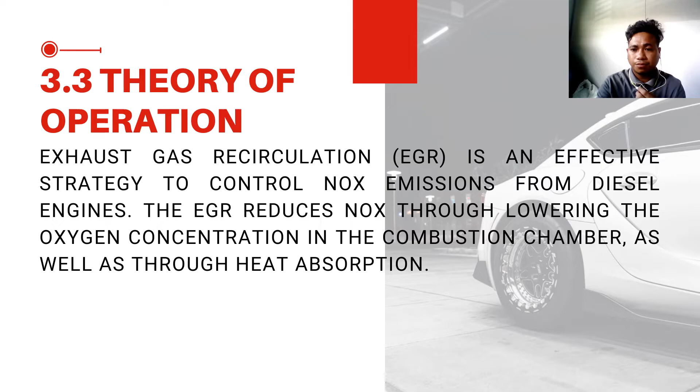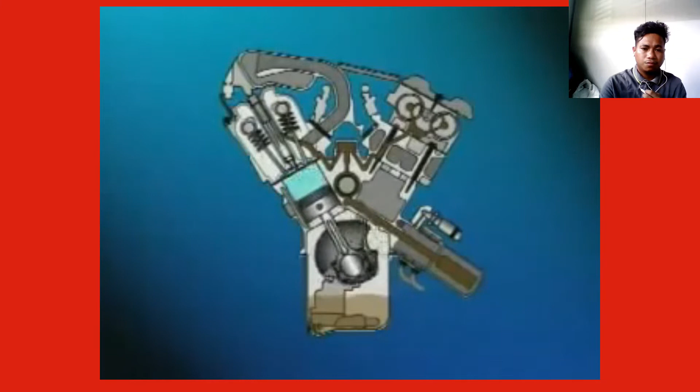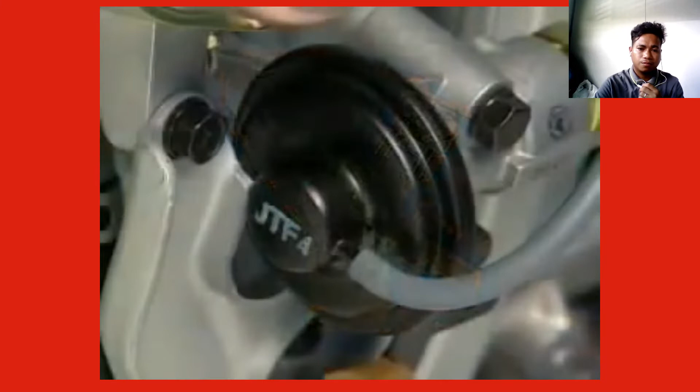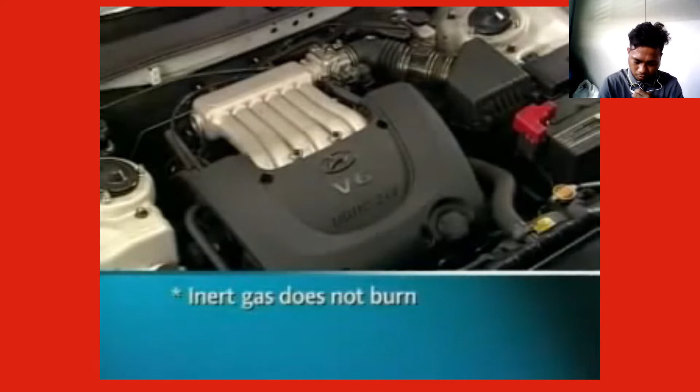The principal function of the exhaust gas recirculation, or EGR system, is to reduce the amount of oxides of nitrogen, or NOx, that is produced during the combustion process. NOx is created by the high combustion temperatures that allow the nitrogen and oxygen in the air-fuel mixture to combine and form oxides of nitrogen. A combustion temperature of at least 2,500 degrees Fahrenheit is required for the oxygen and nitrogen to combine and form NOx. The EGR valve is used to lower combustion temperatures by allowing a metered amount of spent exhaust gas into the intake manifold. This inert gas takes up some of the volume in the combustion chamber that would normally be filled with the air-fuel mixture. The exhaust gas that is recirculated into the intake manifold is called an inert gas because it does not burn. As the exhaust gas does not contain the fuel necessary for combustion, the air-fuel mixture is diluted as it enters the combustion chamber. Replacing a part of the volume in the combustion chamber with the inert exhaust gas reduces the peak combustion temperatures below 2,500 degrees, the level necessary to produce NOx.

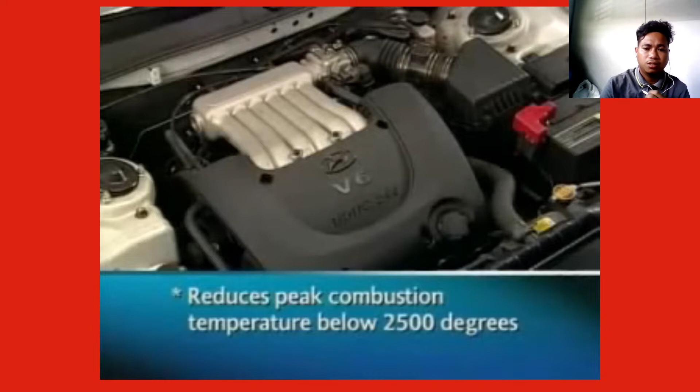Proceed po tayo sa isang topic.

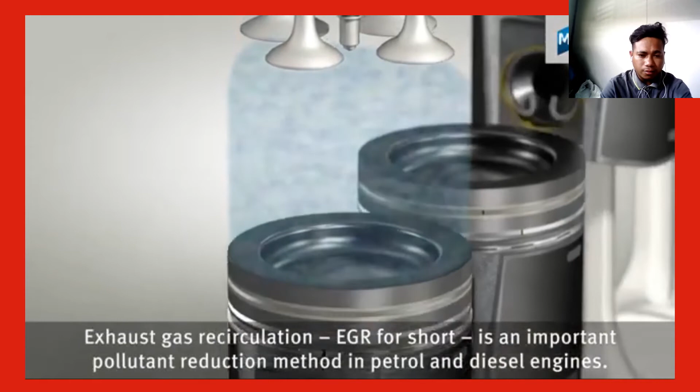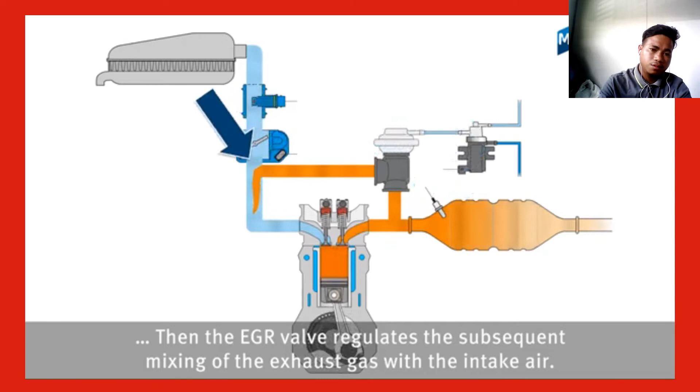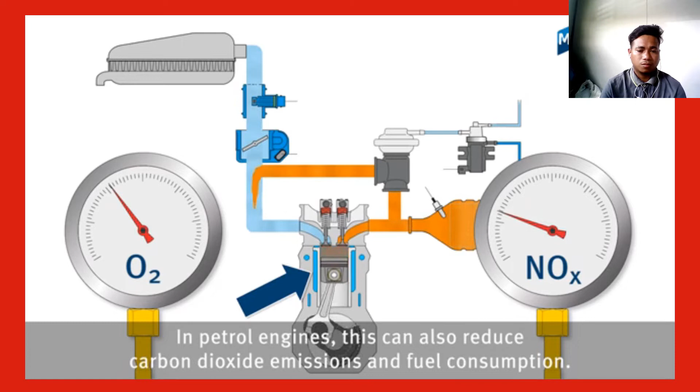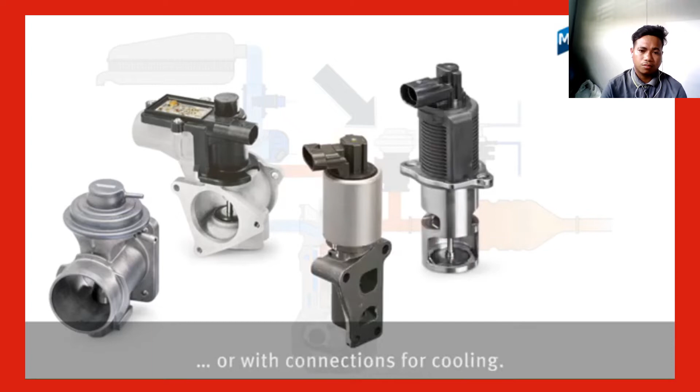Exhaust gas recirculation, EGR for short, is an important pollutant reduction method in petrol and diesel engines. Here we can see its basic structure. Exhaust gas is taken directly after the cylinders. Then the EGR valve regulates the subsequent mixing of the exhaust gas with the intake air. This means that less oxygen reaches the cylinder. Less oxygen means a lower combustion temperature. This way, nitrogen oxide quantities can be reduced by up to 70%, as the higher the temperature, the more harmful nitrogen oxides are produced. In petrol engines, this can also reduce carbon dioxide emissions and fuel consumption. A key component of exhaust gas recirculation is the EGR valve. It meters the quantity of exhaust gas that is returned. EGR valves come in various designs and models, pneumatic or electrical, for petrol or diesel applications, or with connections for cooling.

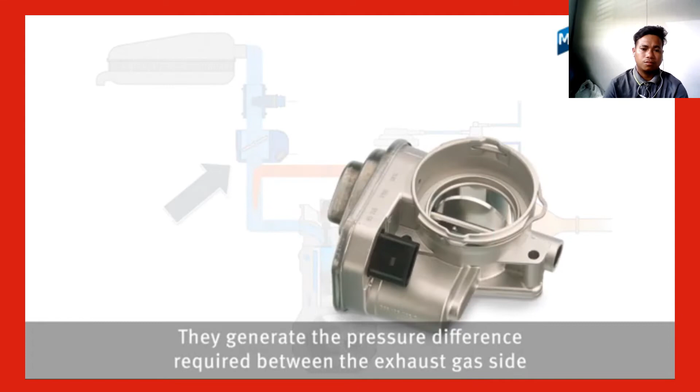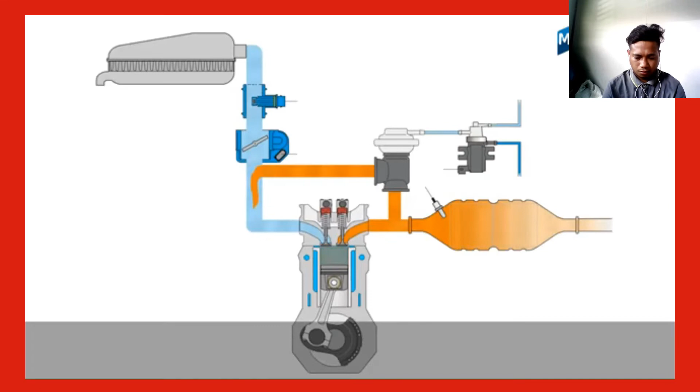Regulating throttles are used in the intake air system in diesel vehicles. They generate the pressure difference required between the exhaust gas side and intake side to achieve the necessary high exhaust gas recirculation rates. Air mass sensors are required in diesel engines to regulate the exhaust gas recirculation, for example.

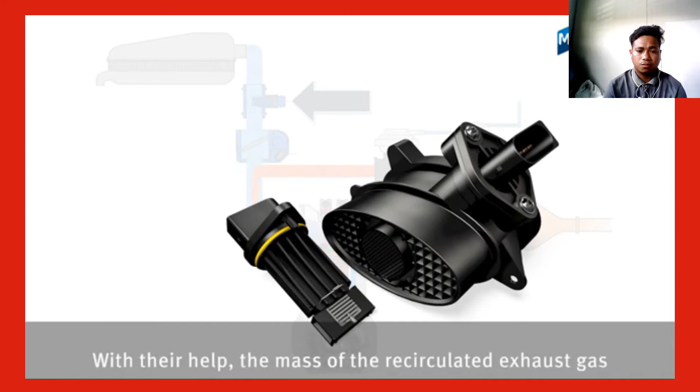With their help, the mass of the recirculated exhaust gas is calculated indirectly using the reduction of intake air.

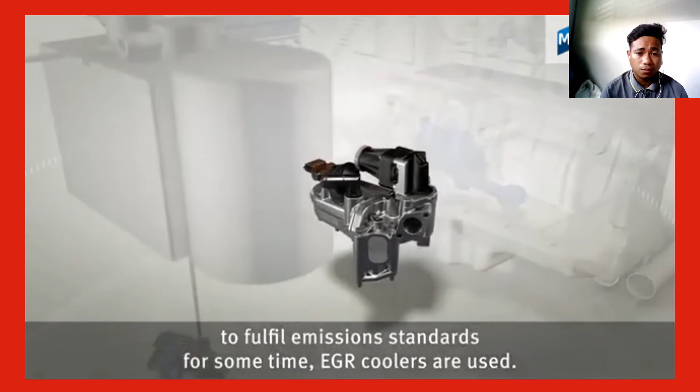Since simple exhaust gas recirculation has no longer been sufficient to fulfill emission standards for some time, EGR coolers are used. Cooled exhaust gas reduces the peak combustion temperature even further. This again significantly reduces the amount of nitrogen oxides.

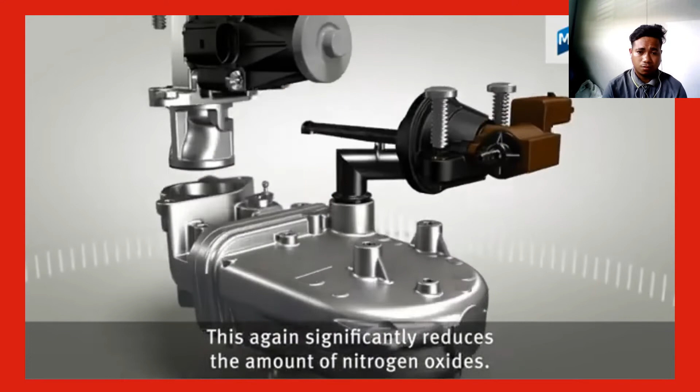Just like all components in the EGR system, EGR coolers are exposed to the extreme conditions of the aggressive exhaust gas condensate. They must therefore be manufactured from highly corrosion and temperature-resistant materials.

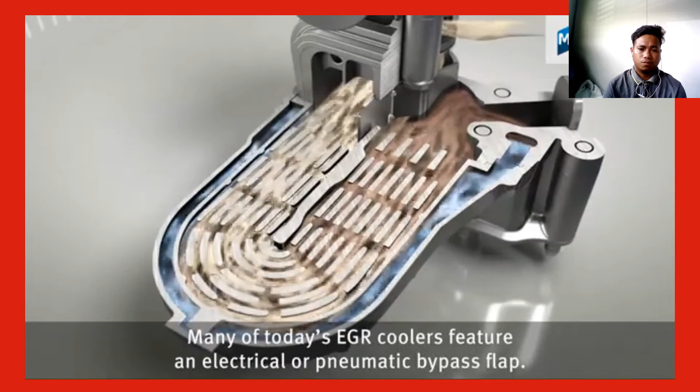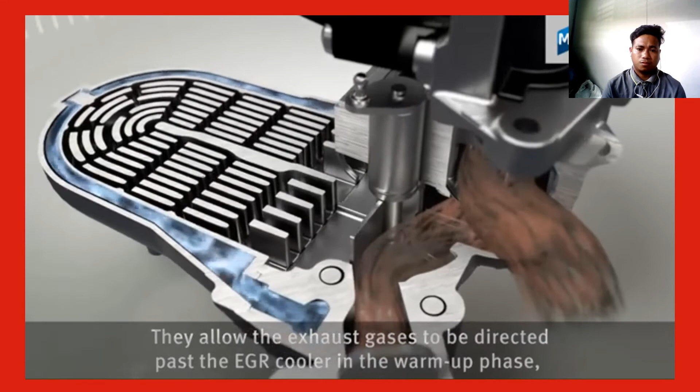Many of today's EGR coolers feature an electrical or pneumatic bypass flap. They allow the exhaust gases to be directed past the EGR cooler in the warm-up phase to quickly bring the engine and catalytic converter to operating temperature.

This also reduces noise generation, the so-called diesel knock, and the raw emission of hydrocarbons in the warm-up phase.

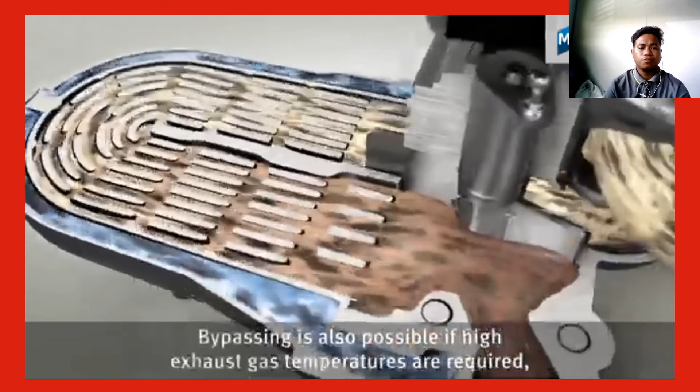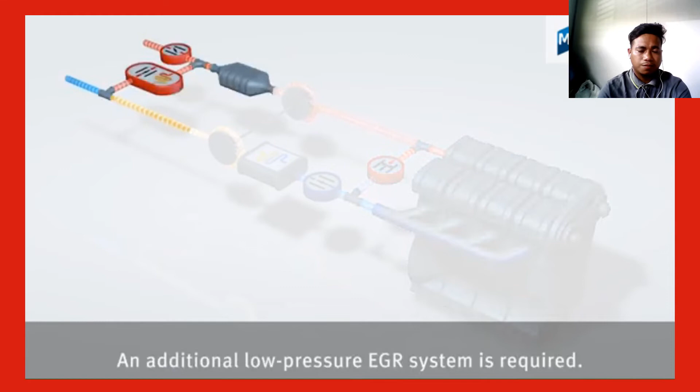Bypassing is also possible if high exhaust gas temperatures are required, for example in the regeneration of the diesel particulate filter. The previous high-pressure exhaust gas recirculation system is no longer sufficient for meeting the limit values as of Euro 6 and Tier 2. An additional low-pressure EGR system is required.

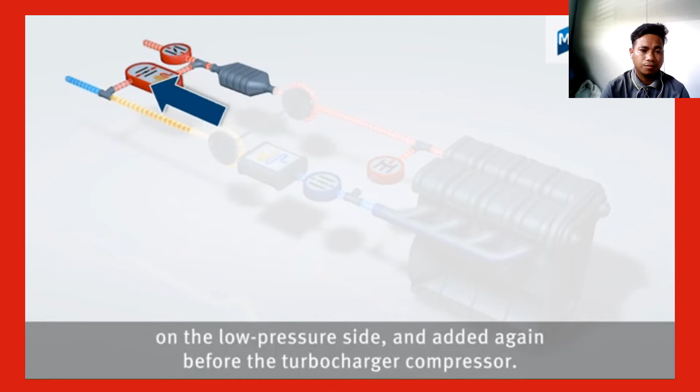With this system, the exhaust gas is taken after the particulate filter on the low-pressure side and added again before the turbocharger compressor. An exhaust gas flap provides the exhaust gas back pressure required for this.

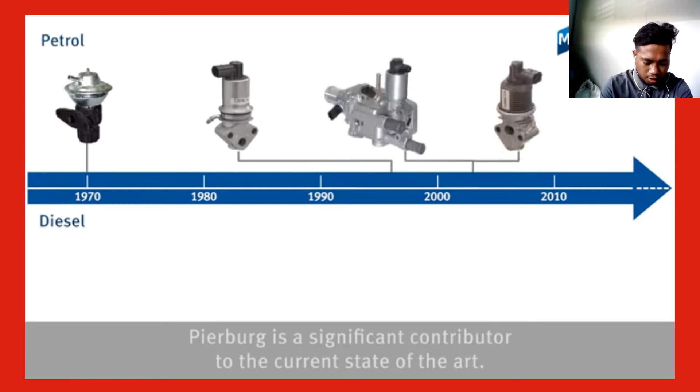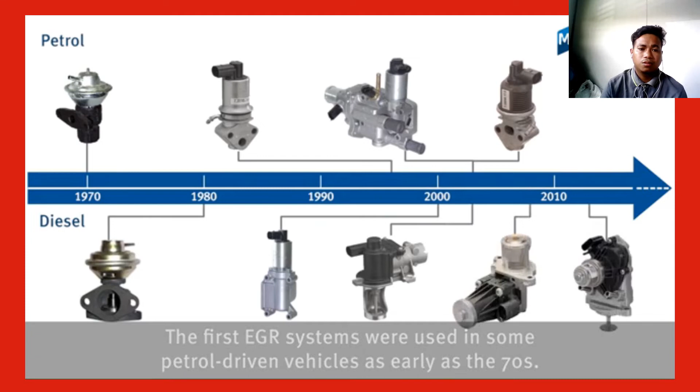The first EGR systems were used in some petrol-driven vehicles as early as the 70s. In the 80s, this technology also began to be used in diesel vehicles.